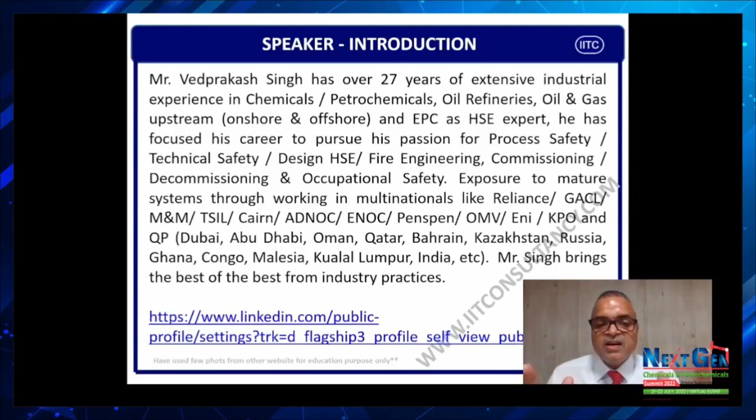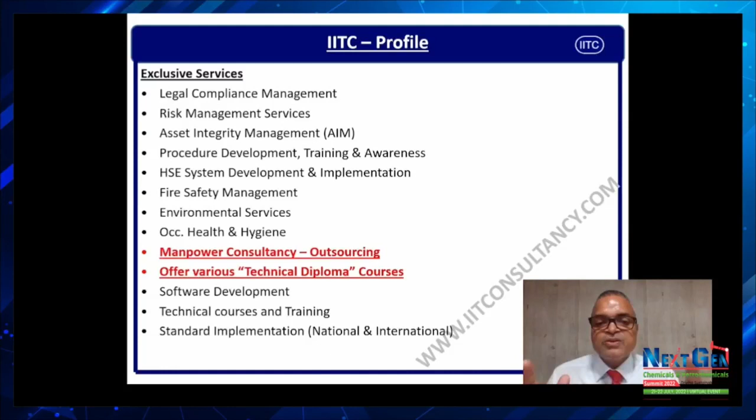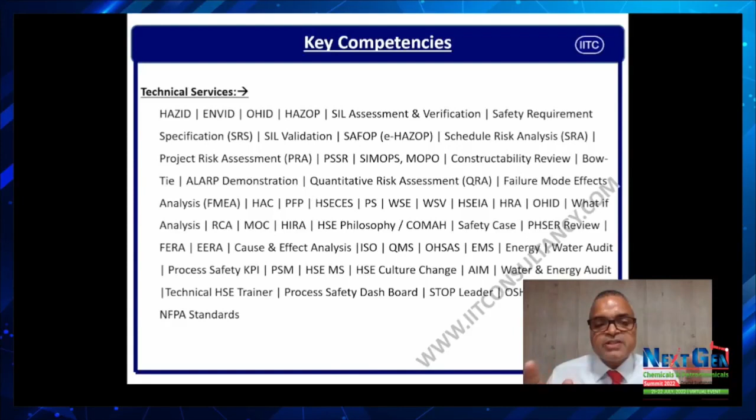These are the list of services IITC provides to their honorable, respectable clients on a time basis, on a regular basis. These are the key competencies of IIT Consultancy and its team, and we provide services to clients depending on the requirement on a time basis.

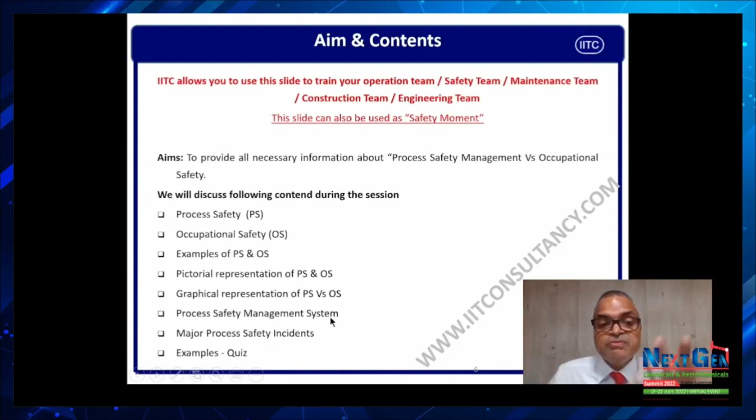Our intention with this program is to provide information regarding process safety, occupational safety, examples of process safety and occupational safety, pictorial and graphical representation of both, and process safety management - what is process safety management, we will see it. And major process incidents, what we saw on the front page, we will see it, along with some examples and quiz we are going to go through.

Guys, let us debate on process safety versus occupational safety. As I explained in the beginning, process safety has come into the picture, as per my understanding, especially in India, in the last one decade, or let's say one and a half decades.

I started my career 27 years back, and I remember, I will not name my colleague who used to abuse me asking why I went and transferred into the safety department. So I did my specialization in industrial safety and got transferred into the industrial safety department. My friends used to abuse me, used to say there is no career in safety. But I can tell you, based on my experience of the last 27 years, I had been lucky to get transferred to work for safety, like you guys.

So occupational safety came into the picture, and as per regulatory department requirements, people used to give it weightage. Then after 2005, I think, occupational safety was there, but process safety took the lead, because earlier it was supposed to be part of the operation department, production department, process department, but later there was a requirement, and each company made one special department for process safety. I hope you agree with me, correct?

Guys, now I will put the ball in your court. Take 10 to 20 seconds, try to understand what is occupational safety, and then we will try to define what is occupational safety.

Guys, if you can see the slide, occupational safety focuses on preventing personal injury only. We will also see the definition of process safety, where you can get clarification about any doubts if you have. Second point says that it is measured using OSHA's recordable lost time incidents, accidents, FR, SR, FSI, etc. This is measurable by this terminology.

Here in occupational safety, the incident probabilities are very high, the likelihoods are very high. Mind it, please remember it. And incident severity, or the consequence of incidents, is low. Because when you say low in occupational safety, you can get some injury like cut, bruise, fracture, eye injury, leg injury. I don't say these are small injuries, but these are limited to one person only. There is very less likelihood that more than one person gets injured in terms of occupational safety.

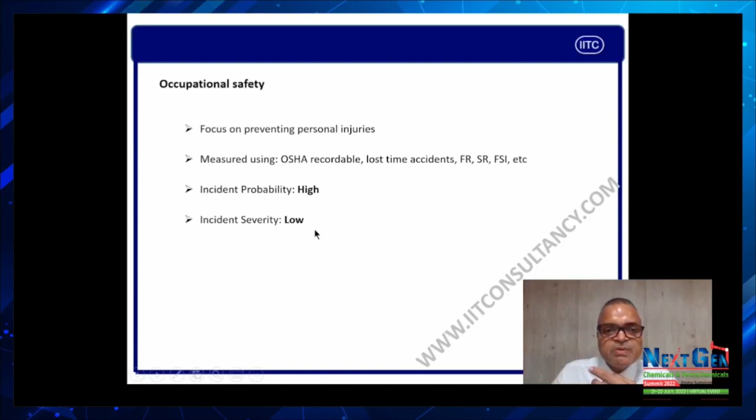You can debate me that, for example, if there is some work going on at height with scaffolding, and there are 10 people working on the scaffolding, if the scaffolding collapses, more than one person gets injured. These are debatable, but in general occupational safety involves injury to a very less number of people, or limited to one, and severity is low.

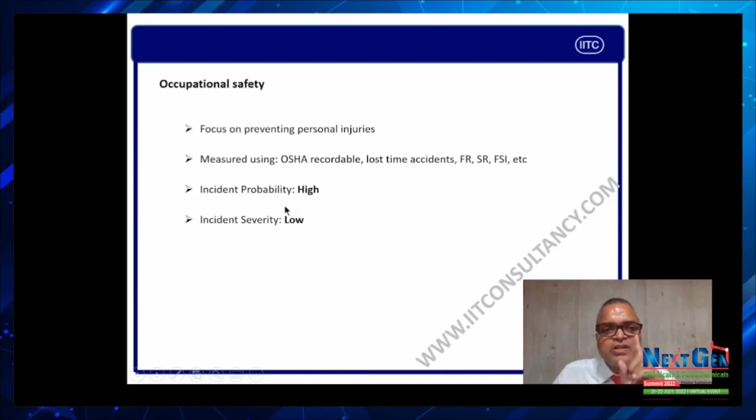Again guys, I will give you 10 to 20 seconds. Try to close your eyes and try to understand what is process safety. As the name suggests, process safety means safety of processes - processes of industries, processes of different elements of the operations. Now let us go through the definition.

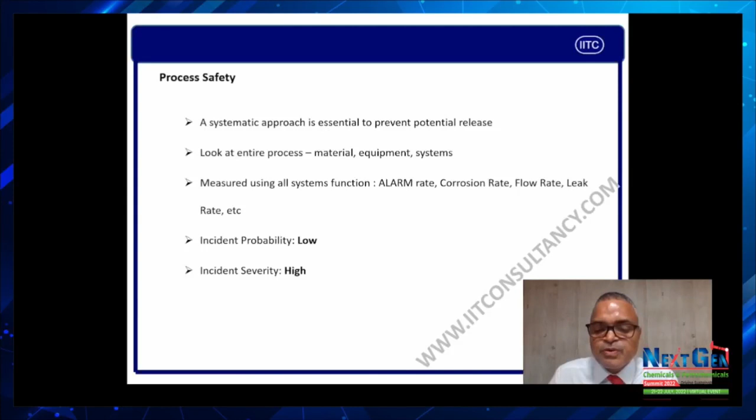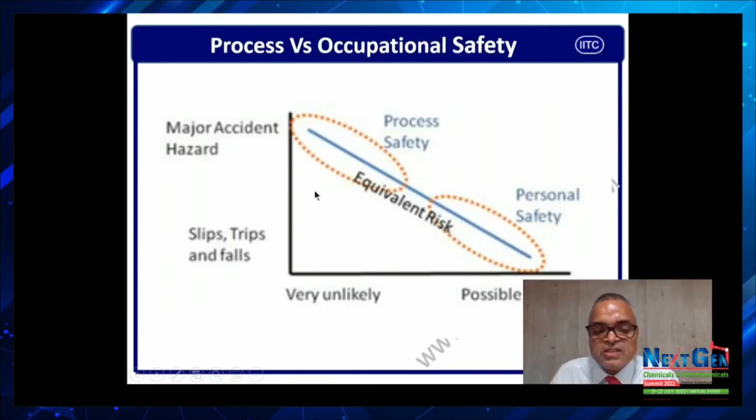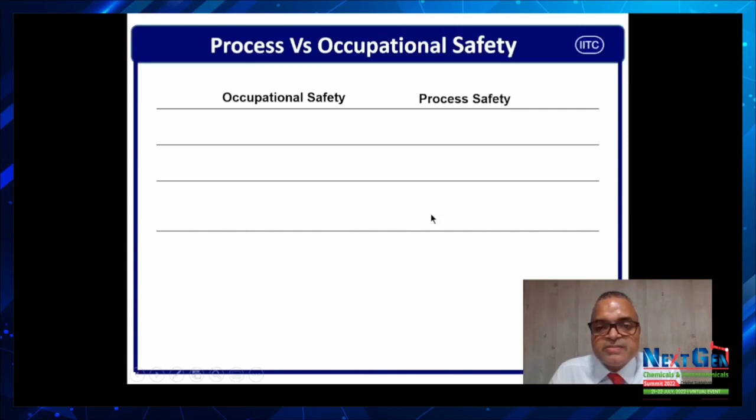Guys, now time has come to see the differences between process safety and occupational safety. So we will see occupational safety here and then process safety here. The basic three differences are here. We will see line by line.

Here, occupational safety - usually only a single person affected, lower consequence, lower severity, less severity with high frequency. This definition we have seen in the previous slides. Now the process safety - potential for multiple fatalities.

Higher consequence, lower frequency. Let us see one example of occupational safety. Occupational safety means if I am doing a grinding job, probably if something goes wrong, the grinding wheel may break and damage my eyes or cut my fingers. So probably I am the only person who is going to get affected. Or if I am doing some cleaning job, I may slip and trip due to poor housekeeping. Only one person is affected. Other people are on their job, there is no effect on other people.

But let us take one example of process safety. In process safety, as we said, this deals with man, machine, material and process. Let's say if there is a LOPC of your flammable gas, combustible gas or toxic gas. LOPC means loss of primary containment. If your storage tank gets a leak which has got toxic material, toxic gases, what will happen? The moment it comes out of the storage tank, this will not kill only one person. This will kill everyone who is in the envelope, in the boundary of this gas.

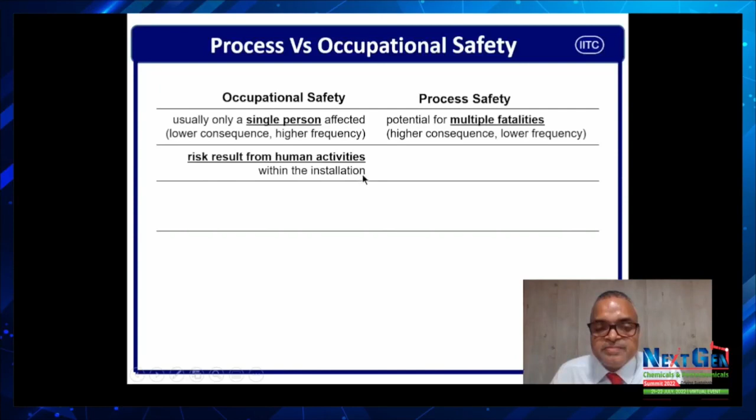Risk results from human activities within the installation. I am doing a welding job, I am doing a cutting job, I am doing a cleaning job, I am working at height. So this is a human activity.

Like process safety, the risk results from the chemical and physical property of process substances. Of course, if LOPC is there, there is human intervention involved, but mainly this is the physical and chemical property of a chemical. If a chemical is toxic, it will create a toxic exposure and many people are going to be affected. If this is flammable or explosive, if it comes out, there is a possibility of ignition. If it explodes, there are many people in the envelope of fire or radiation zone, so everybody or anybody who is in this zone will be affected.

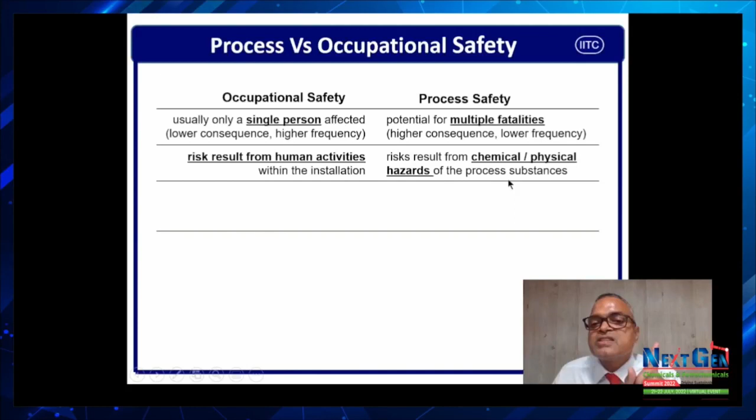So you see the difference - this is human activity, and this is chemical and physical property of process substances. I hope you understand. And if there is any question or suggestion, please share in the comment section.

Human behavior is the dominant factor here, but technical conditions have a considerable role. Here, basically, this is human behavior, so to improve this we have many systems like BBS, behavioral based safety, safety culture transformation. These are related to behavior, and yes, technical conditions also play a considerable role. This we will see separately.

Technical systems are the dominating factor here, but human actions have a considerable role. So like in the first point, yes, there is a role of human intervention, but technical things are more dominating - like which chemicals are to be used, whether more toxic or less toxic chemicals are to be used. This depends on our technology provider, and also on our services, processes, reactions.

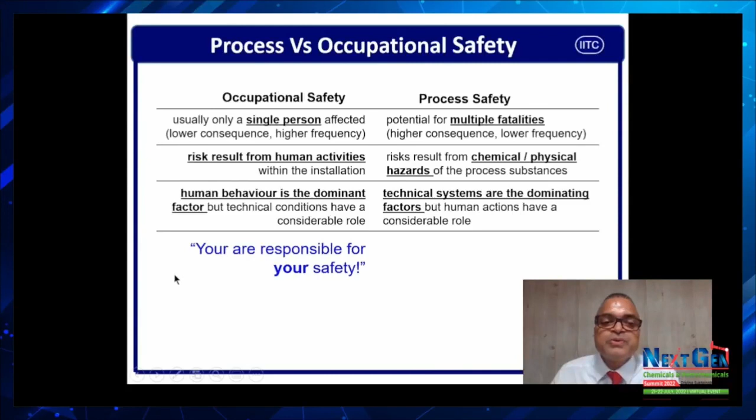Guys, now here we are saying that in occupational safety, you are responsible for your own safety. If I am doing a welding job, your safety officer is liable, but you are responsible to see that your eyes don't get a welding arc eye - you have to use safety goggles, welding goggles. Here, in process safety, you are responsible for the safety of your colleague. You have to ensure there is no possibility of LOPC, no possibility of a source of ignition. So here you are responsible for your own colleague.

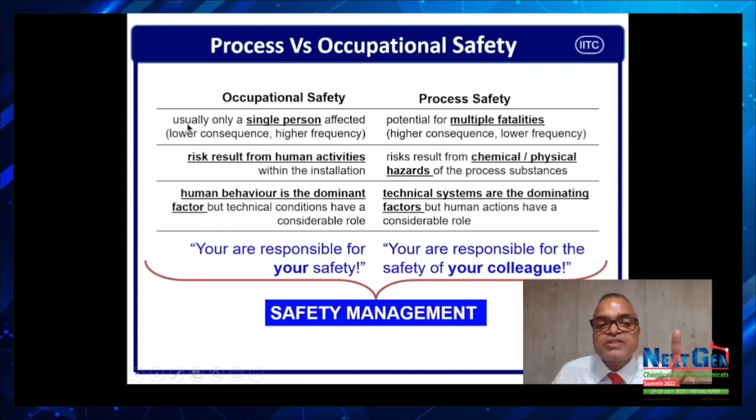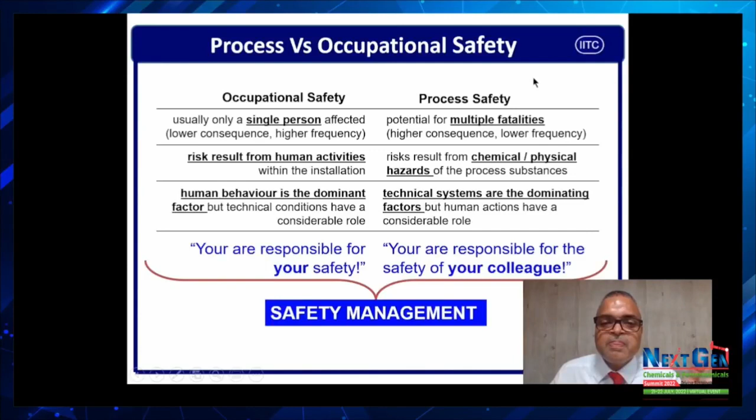Guys, are we in the zoo? No, we are not in the zoo. But yes, I just want to make some differences, some examples of occupational safety and process safety. Let me take it through.

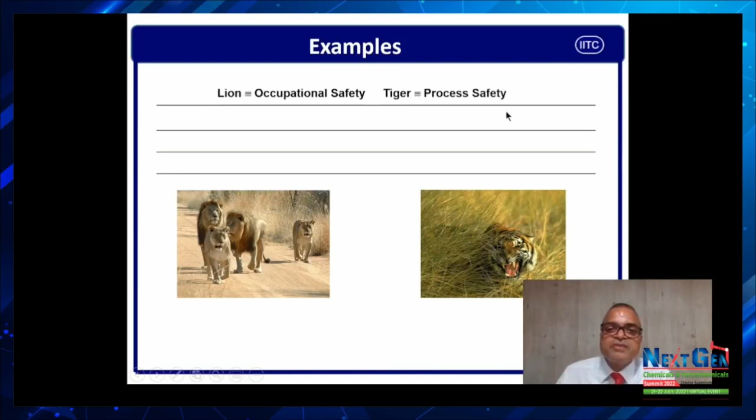Lion deals with occupational safety - you can say why and how. I will take you through with some examples, then you will realize it. Tiger is process safety - how and why? Let us go through number one.

Here, lion hunts in pack. What do you mean by pack? So as we mentioned that this occupational safety frequency is very high. Here the number of lion means the frequency is very high.

Process safety, we say that tiger always hunts alone. That means there is a rare chance of process incidents. Less likelihood. Here more likelihood.

Now going for number two, is often visible. Occupational safety: slip, trip, electrocution, other things are visible. Unsafe conditions are visible. Poor housekeeping is visible. I am not using safety goggles is visible. I am not using my safety hand gloves is visible. I am not using my safety shoes is visible.

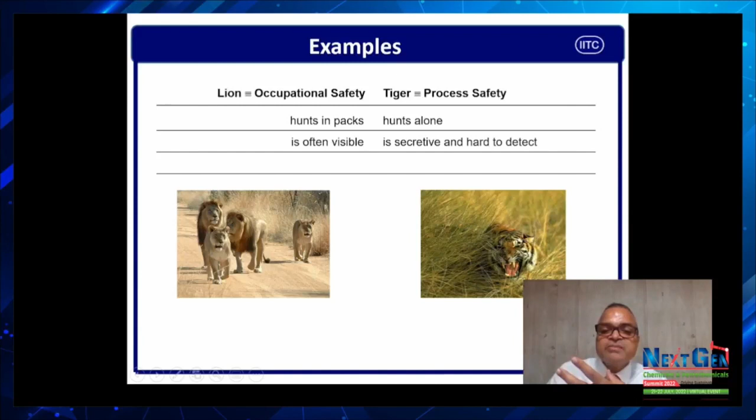But here the things are not visible, secretive and hard to detect. Normally this guy is always hiding himself or herself. You can't see if tiger is behind you because it is hiding behind the tree.

Whereas this is lion. Lion is ultimately lion. Lion is the king of the jungle. They are always visible. Who cares? Correct? Right?

Now, guys, we are going for the third one. Common in its own environment. They are common in its own environment. Everywhere there is occupational safety issues, unsafe conditions, unsafe actions.

You can see, believe me, you can see. If you go in a good company or a bad company - good company means those who are following safety by heart. Those companies that have got only lip service, you go there, you will see the difference.

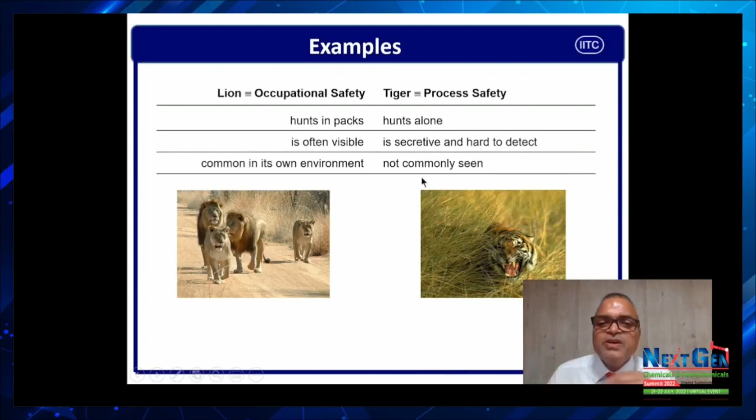Here we say the process safety is not commonly seen. You can't see when your pipeline is going to rupture, when there is a leakage from your pump seal, when there is a leakage from your pressure vessel, when there is a leakage from your storage tank. You don't see. This is invisible.

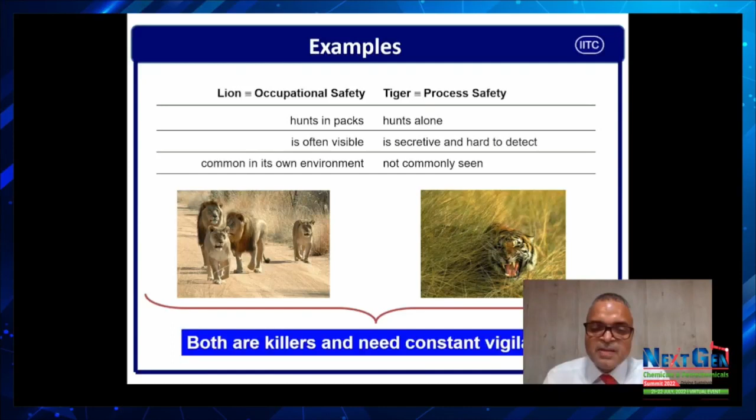So I hope, guys, you have understood the difference - what is occupational safety, what is process safety, and what are the differences between them by graphical and pictorial method. Please put your comments in the comment section. This will encourage me.

Guys, let us take a few more moments to understand process safety in detail. Process safety basically involves prevention of leaks. We have to ensure that all the equipment is in healthy condition. We have to ensure that NDTs are done. We have to ensure that all the PSVs are working.

We have to ensure that all pressure control valves are working. We have to ensure that all TCVs are working. We have to ensure that the leak test, pressure test of these vessels are done on a time basis. Equipment malfunction - equipment means safety instrumented malfunction, SIF.

Safety instrumented malfunction: your PCV does not work, your pressure transmitter does not work, your level transmitter does not work, your temperature transmitter does not work. This is equipment malfunction.

Overpressure - are you creating overpressure in your system? And is there a PSV? Is there a PCV? Corrosion - do you have corrosion alarms in your system? Do you put your corrosion inhibitors in the system? Metal fatigue - sometimes metal fatigue can also create LOPC, loss of primary containment.

Number second, know your process, both physically as well as technically. I will not take much of your time. I have prepared a detailed training program on process safety covering the 14 pillars of process safety as per OSHA. So you can feel free to go through that program to understand process safety in detail.

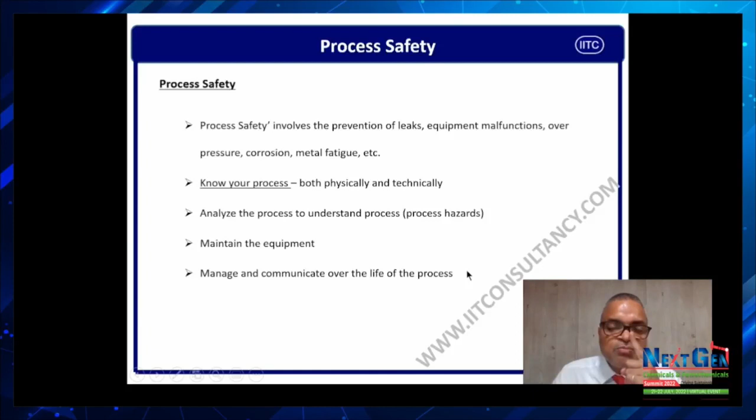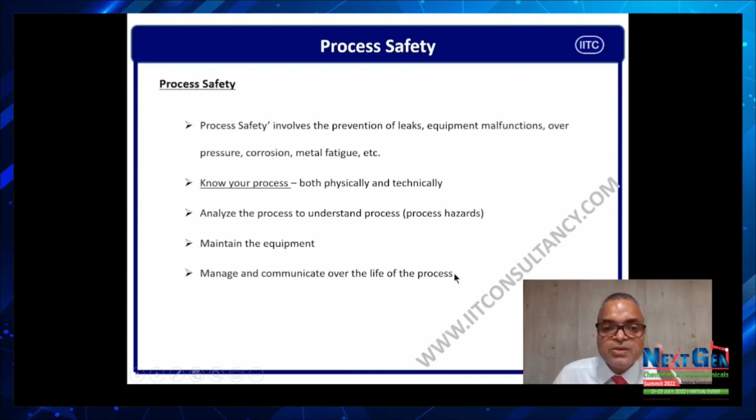That means from design, construction, commissioning, operation, and decommissioning, the complete life cycle we have to manage. Otherwise, one small mistake can create havoc, and this will be a very costly incident, because process safety does not kill one. Process safety kills everyone who is in the envelope, in the boundary, in the battery limit of the process safety event.

So guys, these are the basic understanding of process safety. Let us give a few seconds to understand process safety management quickly, I will not take much of your time. Process safety management is a proactive approach or process where we need to identify the hazard.

I would request you to please go through my training program on quantitative risk assessment. You will understand the basic meaning and understanding of process safety in terms of QRA - safeguarding of releases of hydrocarbon substances, hazardous substances, and process accidents.

I would like to say that process safety incidents are those incidents when there is an LOPC of hazardous substances. Let's say if there is a pressure vessel or a pipeline filled with water, this leaks. On the other side, if there is a storage tank or vessel filled with toxic gas, H2S or SO2, this leaks.

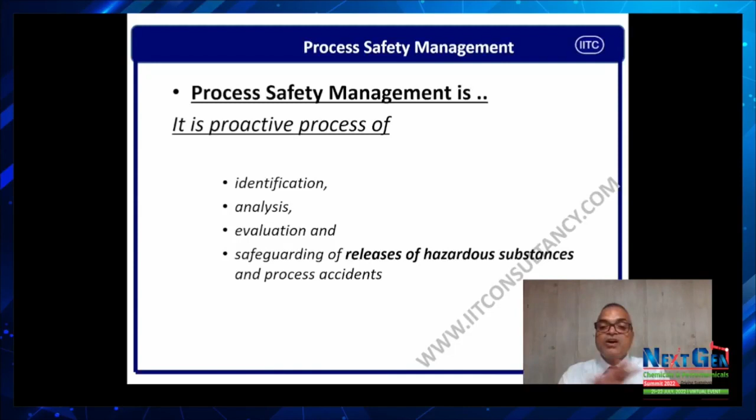Guys, as mentioned, process safety deals with the physical and chemical properties of substances. So process hazards are associated with the chemical and physical properties of substances being handled in the industry. If there is no hazardous chemical, there will be no process safety events.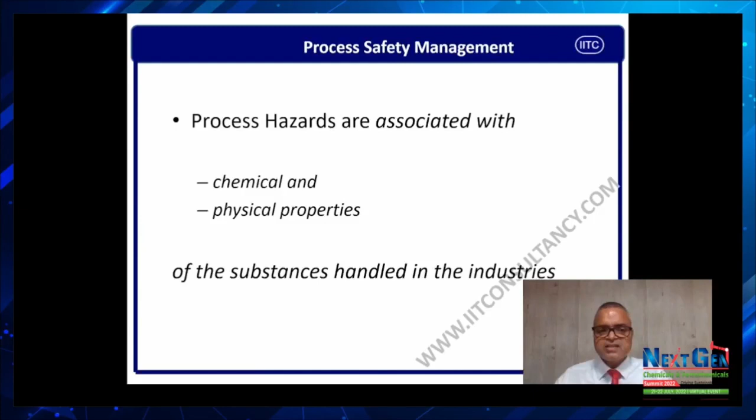In an engineering company, they have a lathe machine, milling machine, drill machine, drying machine, grinding machine - there is no chance of a process safety event unless they have ammonia, chlorine, or other chemicals for utilities. Correct? Yes. So guys, what are the chemical properties? Why are we so scared?

Because a chemical has got basically four inherent properties or qualities. First is flammability or flammable hazard. Second is toxicity - a chemical may have toxicity in nature. It has explosivity, explosion potential. It has reactivity. So we must know all four properties of each chemical that is being stored, transported, handled, used, or produced.

Being transported, being handled, being used, being produced, being stored, being transported in your industry - if you are able to manage all these properties in the tank, storage tank, process vessel, supply tank, or in transportation, that means you are safe. There is no process safety event.